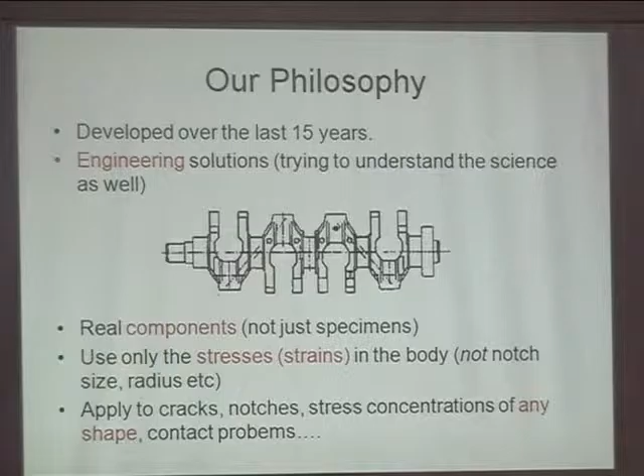But it does take you down a certain route. What we found over the years was that we stopped using cracks, because we found it's much easier to do tests using notched specimens rather than cracked specimens, as we find cracked ones tend to fool you. And in a lot of cases we're not very happy even about using plain specimens because they can fool you as well, and again, plain specimens are a thing that never happens in industry anyway. So nowadays we tend to do tests on specimens of several different types of notches, different sizes or shapes of notches, and come to our conclusions just based on those.

We assume, of course, that there's an accurate finite element analysis available, such as for this suspension component, which was done by Fiat. I suppose that really changed everything over the last 20 years, because it became possible to actually do that. For more and more components now, you can get a reasonable finite element analysis of the whole component with reasonable loading boundary conditions at the kind of resolution, the kind of element size, that we would need to incorporate some of our methods. So that's really why the things we were doing started to become interesting in industry.

As a matter of principle, we try and use linear elastic analysis just because it's easier and quicker, but of course there are problems for which it's just not going to work, and then we give it up and use something else. I think it's also important when trying to do this kind of work to have some kind of target for what is a successful result, because you make your predictions and then compare them to experimental data. You want to know whether you're right or not, and so we set this target accuracy of 20% on stress.

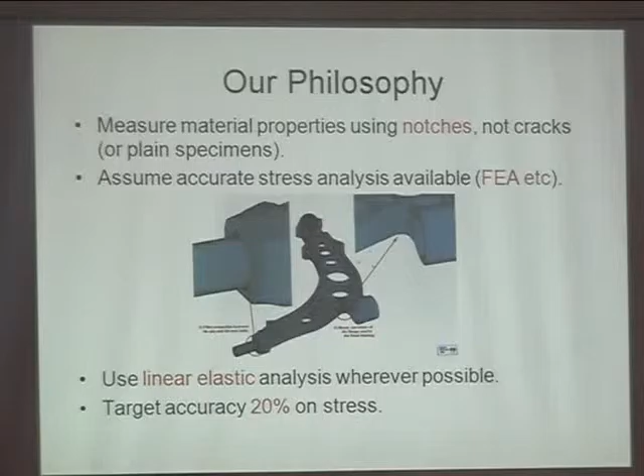So whether that's the stress for a brittle fracture or a stress for a fatigue strength or endurance limit, we said if we can predict the experimental results with better than 20% accuracy, then that job's done, we'll go and do another one. Because there's always going to be some errors of that kind of order inherent in the various data and predictions and models that we're using. So these were the overall principles that we started using all the way through.

So comparing stress fields, I suppose that's the crux of the whole problem here at this conference. If you imagine two different bodies, both of which have got some kind of stress concentration feature in them, and you look at the stress fields, or you could say strain fields or energy fields, it doesn't matter, the two bodies are going to have the same mechanical behavior if the two stress fields are the same. So if one is going to fail, the other is going to fail, and so on. Really, all we're talking about is what do we mean by the same. Sounds silly, but here's a more concrete example.

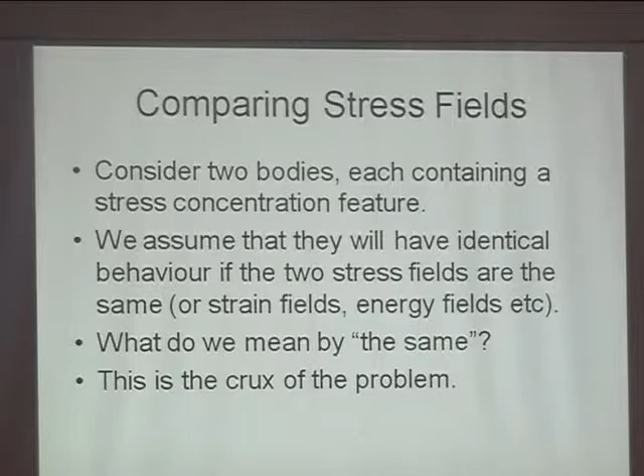So I'm going to talk about two methods which we developed, one called the crack modelling method and the other called the critical distance theory, which both really just come down to this question: you've got two wiggly lines and you want to know whether they're going to lead to the same physical behaviour or not. So the first one is this thing called the crack modelling method, and this goes back to some work done by Rod Smith and Keith Miller in the 1970s. It was a little bit of work, they only published a few papers on it, and it's one of these things I think is really important and useful, and it hasn't really been picked up or used very much. In fact, I think it's actually the best thing that Rod Smith and Keith Miller ever did, but we can argue about that later.

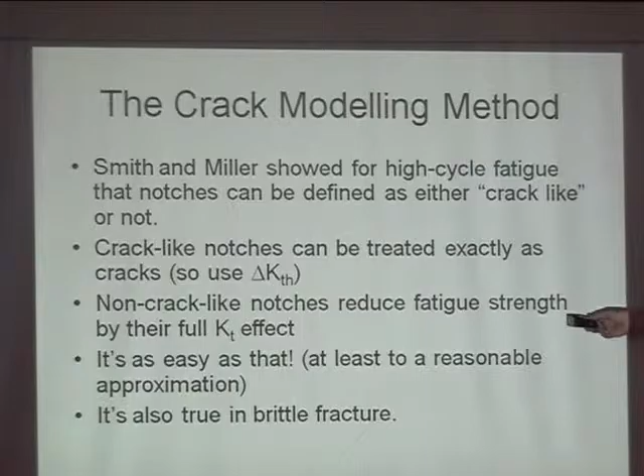So really, all these strange empirical equations and things for comparing KT and KF—you don't need to use them at all, because this is the case. Either you can use KT or you can't, and if you can't, you can just pretend that the notch is a crack. It really is as easy as that. They did it for high cycle fatigue, and it turns out to also be true for brittle fracture, and these are the kind of graphs they were drawing.

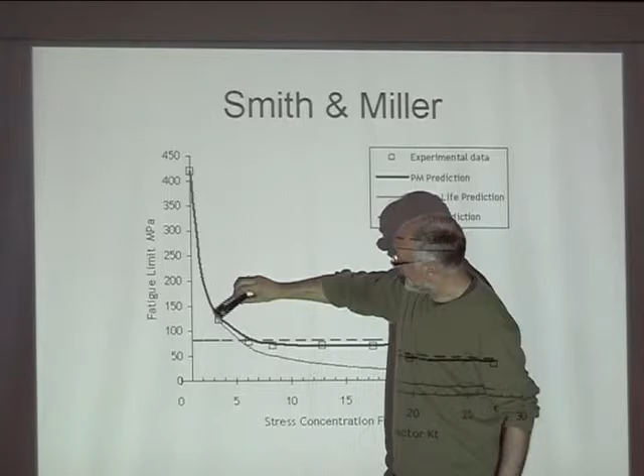This is some data from tests on notches in steel, which I put together with their predictions, but it works the same way. Here you're looking at a fatigue limit for a series of different notches with different KT factors, and what's constant is the length of the notch. In all these specimens the notch length is the same, so KT is being increased by sharpening up the root radius. If you have a low KT factor, less than about 4 in this case, then the fatigue limit—this is the plain fatigue limit—just comes down, and it comes down exactly by dividing by KT. That's very simple.

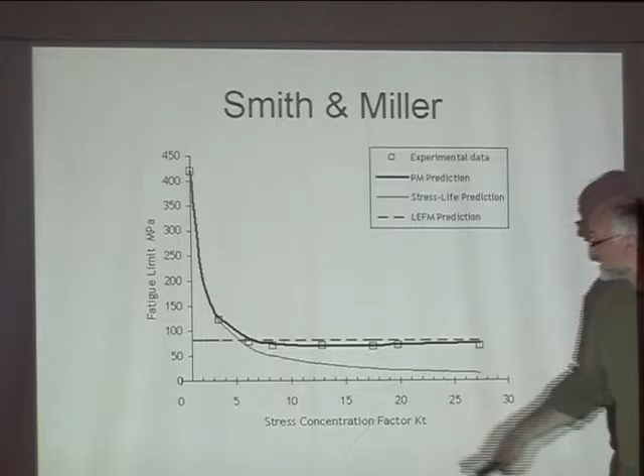The dividing-by-KT line carries on down here, and obviously underestimates the data when you have sharp notches, but all the sharp notch data lie on that dashed line, which is the LEFM prediction, just pretending that these notches are cracks. This would be a prediction valid out here at KT equals infinity, but in fact it turns out to be valid all the way into the point where these two lines cross over.

So there are some differences, of course, between the data points and the predictions, but they're really very close for a lot of different materials. That's what they did, and I think that's very important.

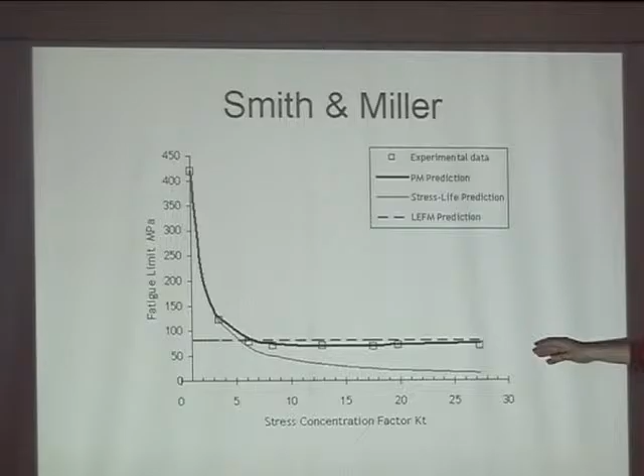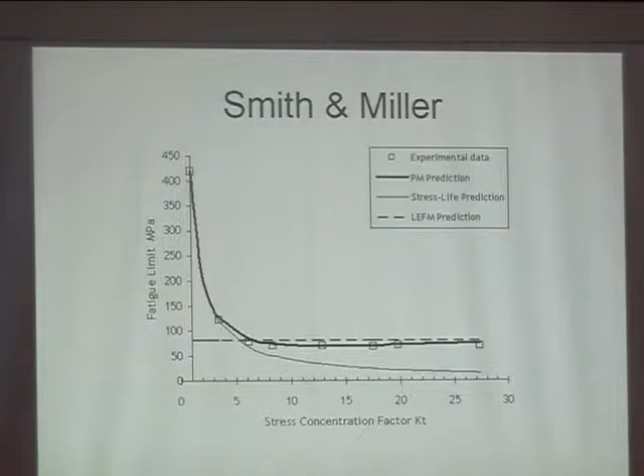The problem then with translating that into using it for an engineering component is to know what the LEFM prediction is in the case of a component. In this case it's fine because I've got a notch at a certain depth—let's say an edge notch of 3 millimeters long—so I can say that's the same as an edge crack 3 millimeters long. Now I know the equation for stress intensity and I can plug it in.

But suppose I don't have that—suppose I've got a component which has a corner with a certain fillet radius or something like that. If it's a 90-degree corner, for example, and the fillet radius is small enough, I can imagine that it's going to be one of these crack-like notches. But the problem is, what crack is it now like? Because I don't have a length anymore, so I don't have any way of calculating the K value.

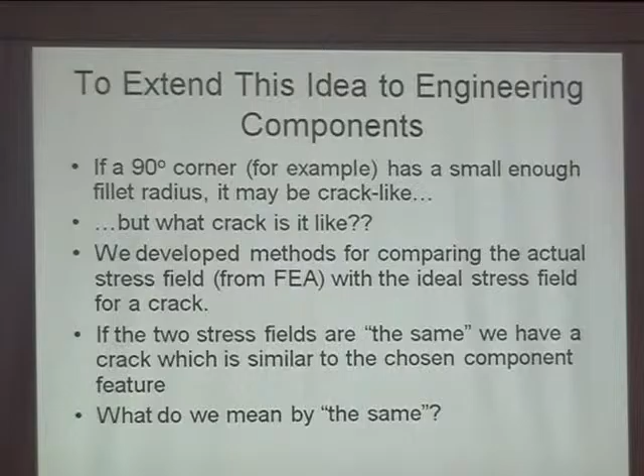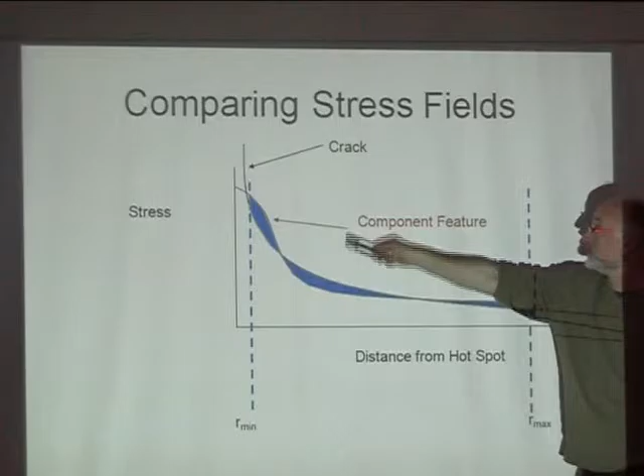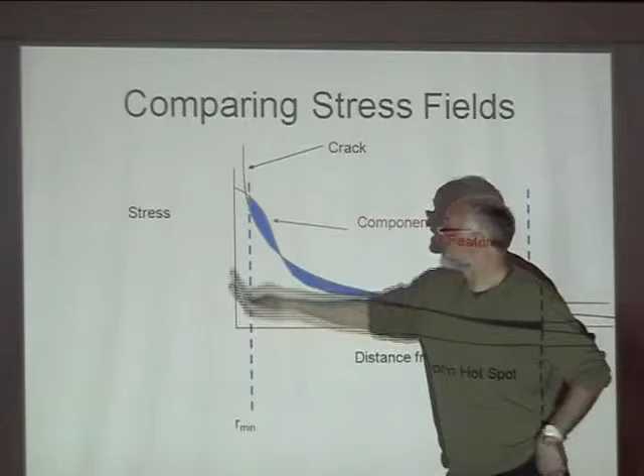So what we did was develop some methods of post-processing the FEA stress field to find out what crack this problem corresponds to. And so we come upon this problem of two stress fields and deciding whether they're the same or not. It doesn't matter too much what method you use, but we just use a method of minimizing the area between these two lines—between the line that corresponds to the crack and the line that corresponds to the component feature.

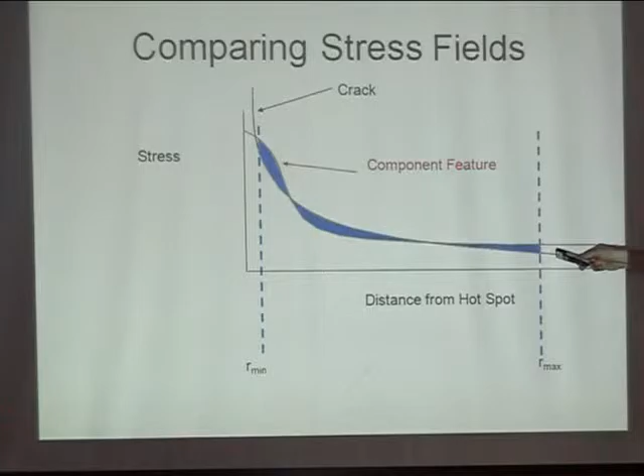Of course, you have to have limits on this. You can't look at R equals 0 because the crack stress has gone to infinity, so you have to have some positive R min. And you don't want to look too far out because you might start seeing effects due to other features in the component or whatever. So you have to limit yourself to two values there. But apart from that, it's not difficult.

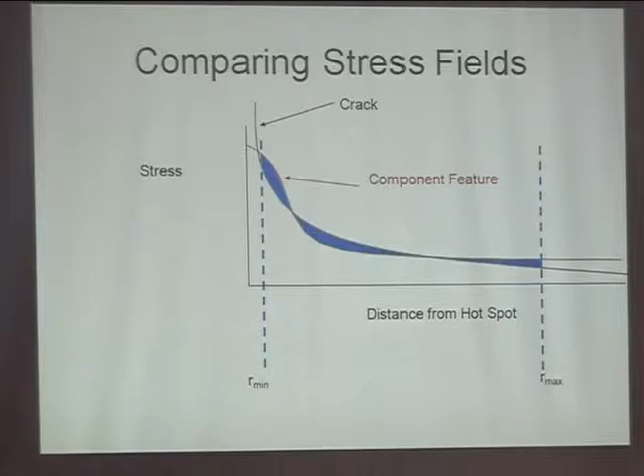Then all you do is keep changing the parameters in the crack model, varying the position of the crack line until you get a crack line that's as close as possible to the component feature line, and that's your best guess as to the equivalent crack for the problem. So that's it—it works remarkably well.

I won't show you results because we've published a number of papers with all these results in, but suffice it to say, we looked at a lot of different materials and different notches, and also 3 or 4 actual component problems where we could get good results from this.

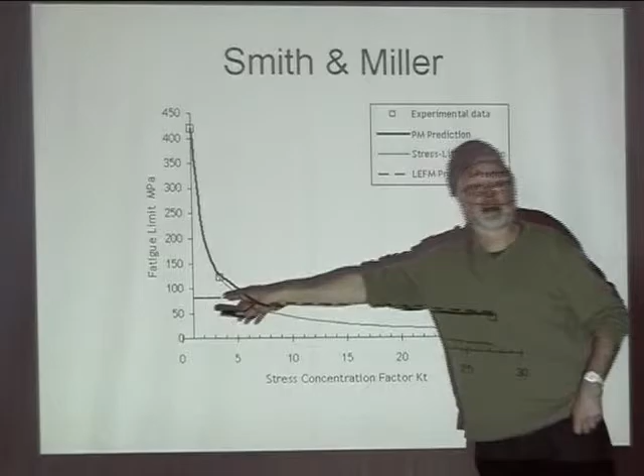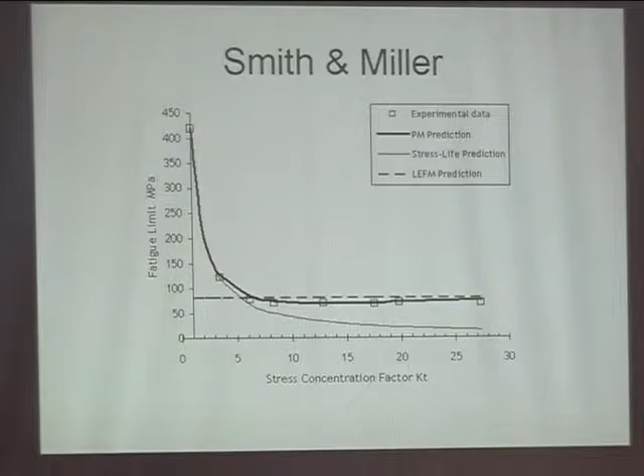It's a funny thing actually that very often the notches or features don't really look like cracks at all. If I go back to that graph, here it's crossing over at a KT value of about 5, but for some materials that crossover could happen at 3 or less. So you might have something that's actually a circular hole, for example—you wouldn't dream of thinking it was a crack, but it turns out to be one of these crack-like notches, and the prediction works fine for it anyway. So sometimes intuitively you wouldn't expect to use a crack model, but it turns out you can.

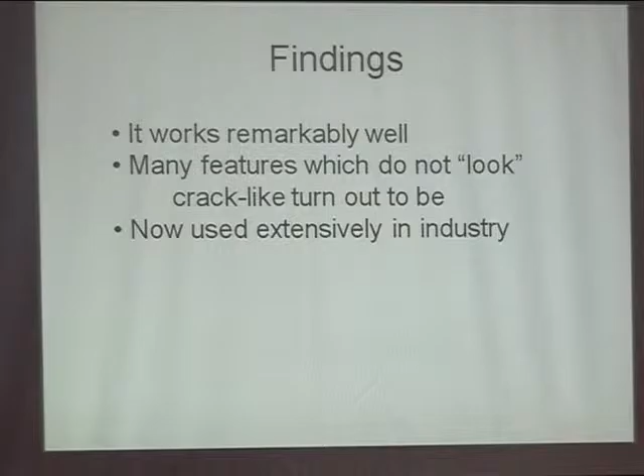Okay, so that's that one. That's the first of the two models.

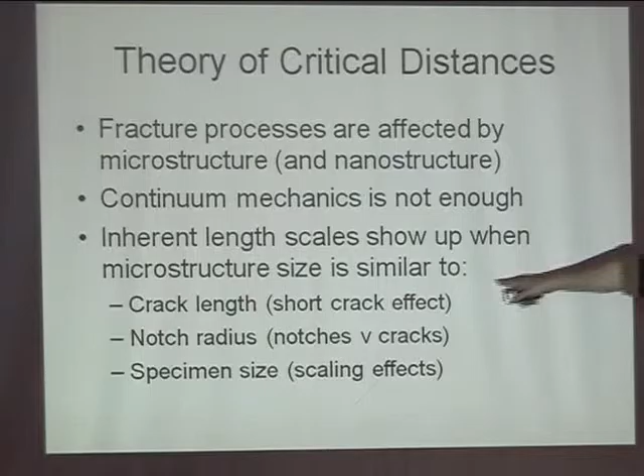This critical distance method is really just the simplest possible way of introducing the idea of microstructure, the idea of a length scale, into what is otherwise a continuum mechanics model. We define some length constant which stays constant, and when you change the scale of the rest of the problem, the length constant doesn't change—so this corrects the continuum solutions in all these problems.

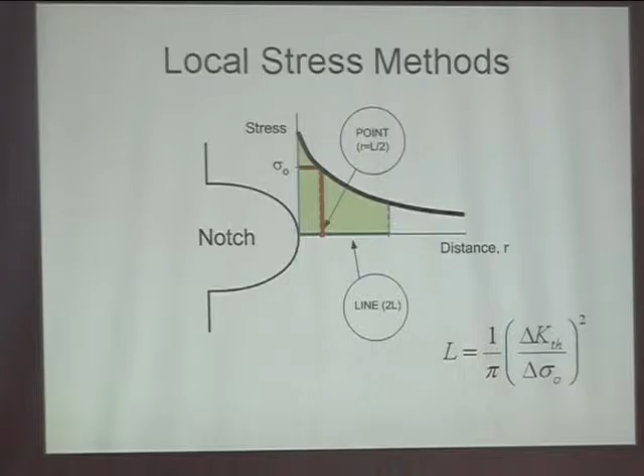Within the family of what we call the theory of critical distances, there are two types of methods. One is based on local stresses, either averaging stresses on a line or area, or choosing a stress at a point. Then there are stress intensity methods, such as having a notch with no crack there, but imagining there's a crack there—or a new one I've been working on with Pietro Cornetti and people in Torino, which we call finite crack extension, where we imagine the crack goes forwards not smoothly and continuously, but in jumps, and the size of the jump becomes important.

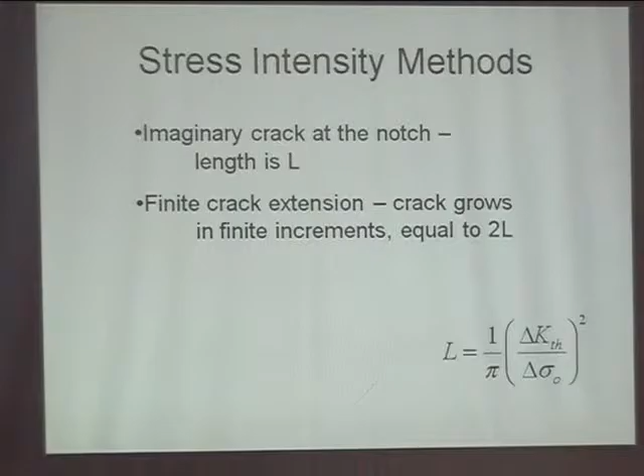The interesting thing is that all these distances—whether you're talking about the distances involved in these stress-based methods, or the lengths and increments of these cracks—they're always related to this constant L, which always has the same formulation. It keeps jumping out at you, whichever kind of method you try to use.

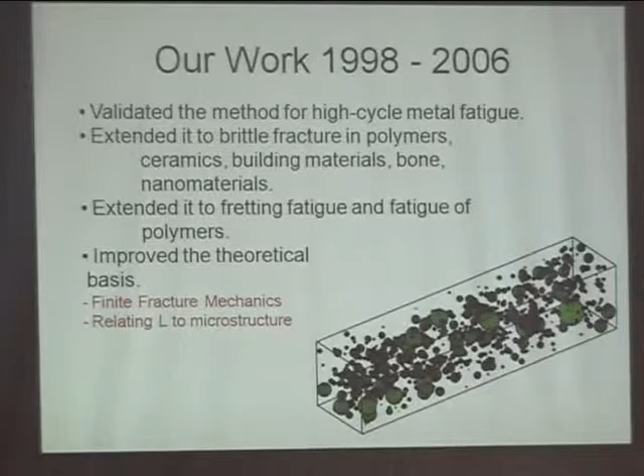Brief history, which I won't do because I don't have time, so I'm not going to talk about that.

Work that we've done over this period of time was mostly in extending the theory, extending its use into different domains, looking at different kinds of materials and problems in fatigue and fracture, and also trying to understand more the theoretical basis of why this method works. For me, this finite fracture mechanics—this fracture mechanics of crack jumping—is, I think, the best theoretical justification for the theory of critical distances. On a more qualitative scale, L has always got to be connected back to something in the microstructure, and very often you can show that L is directly proportional to something like grain size.

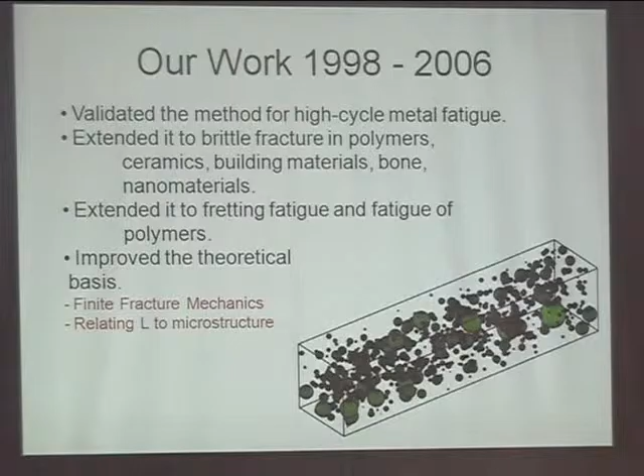Obviously it depends on what material you're talking about, but in cleavage fracture of steels, for example, steels at low temperature, L is exactly equal to the grain size, and there's a direct proportionality there. So those are other examples of that.

Recent work has been mostly done by Luca, who has really attacked the fatigue problem very seriously. He's been over in our labs doing lots of tests and building lots of models, and he's been putting my name on the papers as well, but I'm not really sure why. If you have any questions about this, he can answer them.

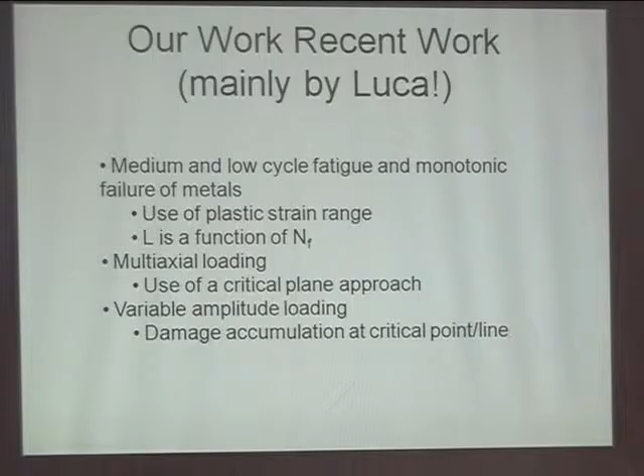I guess he took the view that in order for this theory to be taken seriously in fatigue, you have to attack the difficult engineering problems, especially medium and low cycle fatigue, multiaxial loading, and variable amplitude loading. In each case, he's shown that you can take some existing approach, like for example in multiaxial loading a critical plane approach, and combine that with the critical distance theory, do all the calculations, and it still works out.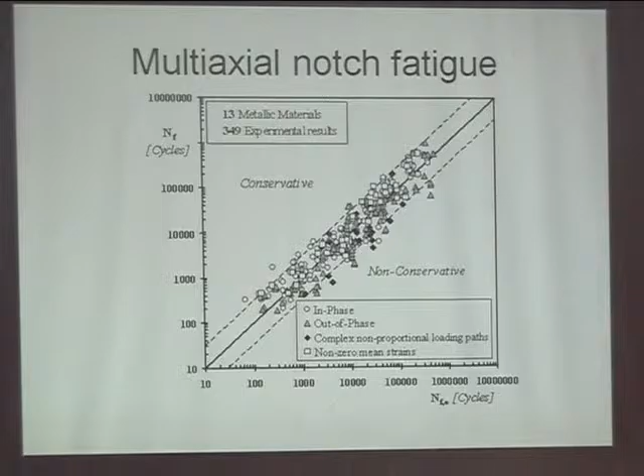In this case, 300 and something experimental results, plotting the actual number of cycles to failure against the predicted value. The criteria for success here is if the data falls within these dashed lines, because that means the scatter is no worse than the scatter on the original SN curves. Of course, you can't really do any better than that.

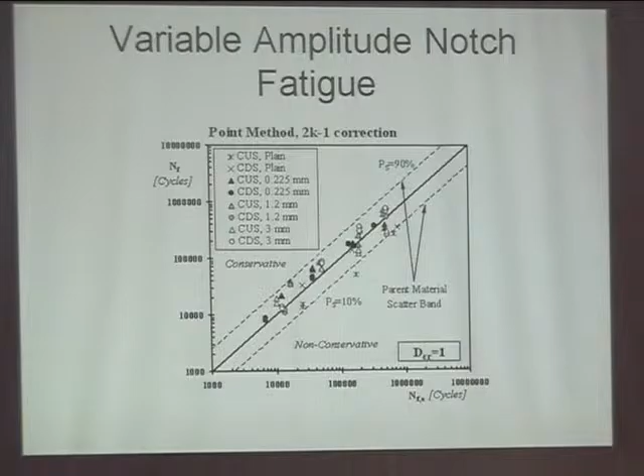You can see that looks pretty good, for a lot of different types of multiaxial loading. And then this one is for a number of different types of variable amplitude load spectra, and again the predictions come out very well. So thank you for listening to that very quick and rather philosophical chat.

The only concluding remark I'll pick out, and this is really true, is that if you want to be convinced about these methods, just try them, because they're very easy. A lot of people will say this is too easy, it couldn't possibly work. But we find that anybody who's actually made a few models, done a few tests, and gone through the process of implementing the model is generally convinced of the value of these things. So give it a go. That's what I'm saying. Thank you.

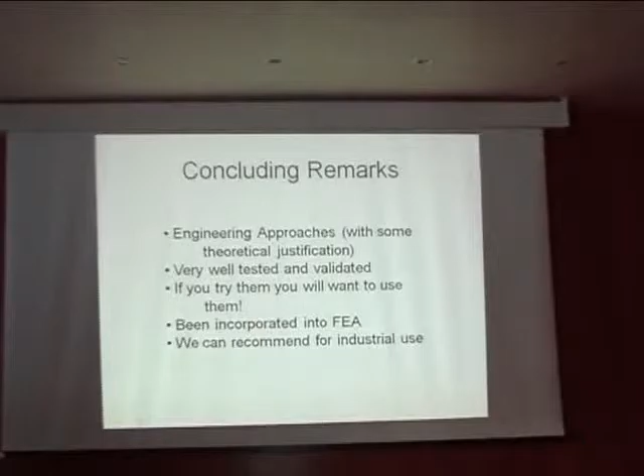Okay, maybe to make it much easier for you, what kind of singularity are we talking about? Because in nature, cracks never have a zero radius crack tip. Even with an ideal cleavage crack, you have a radius on the order of atomic distance. So there is no zero crack, there is no real singularity. Every crack you find is actually a sharp notch.

That's the first comment, and the second, which was also mentioned, is that you have no linear elasticity—you always find non-linear elasticity. If you go to say 0.2%, you have non-linear behavior. So everything—you have no real singularity. Okay, so I think he's agreeing with me, isn't it?

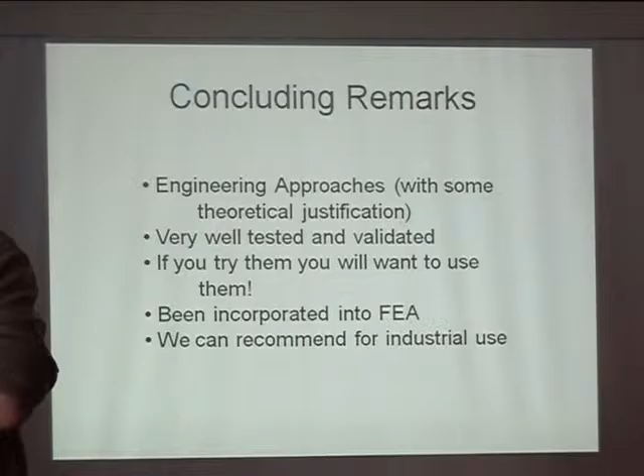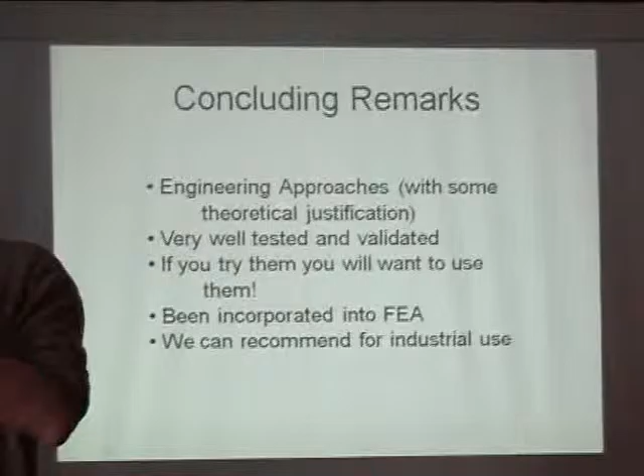Oh yeah, no, I see no problem. Actually, funnily enough, looking at the data, that's sometimes yes and sometimes no—sometimes it's pretty much constant, but sometimes it changes a lot. You're right. I guess what we're doing is always finding the critical distance without reference to the microstructure. We find it by doing tests on, say, a couple of different notch geometries, and this value pops up as the correct one to predict the data. But then, of course, it's interesting to look and see how that compares to the microstructure.

As I say, in some cases there's an exact correspondence between the crack length and the microstructure, but in some cases there's not, and you wouldn't really expect that, because grain size doesn't do everything. In a problem like fatigue, the grain size may be affecting the yield strength and plastic behavior, and that may be affecting the amount of plasticity-induced closure you get, and it's the closure which really decides whether the crack grows or not. So there's always a link back to the microstructure, because microstructure controls everything, but it may not be a simple relationship like that.

Funnily enough, a guy called me up the other day with a problem replacing a component in a power station. He said, I have this cast chromium steel with a very big grain size of 3 millimeters, and I'm worried about whether it'll be okay with these sharp notches we're putting in it. I said, well, you need to do some tests and find out what the critical distance is, but I guess it'll be about 3 millimeters. He came back to me a month later and said, hey, you were right. So sometimes you just get lucky.

Just asking about plane stress and plane strain, you will have a different L value because you have a different toughness or a different fatigue threshold. If you're talking about toughness, of course the toughness in plane stress and plane strain will be different. So you'll get a larger L value in plane stress. We've shown some interesting cases with data for notches in metals, where as the notch becomes blunter and you have to apply more stress, it changes the constraint - it changes from plane strain towards plane stress, and we can predict that. So the L value obviously changes.

I have a last question - how would you measure or find that critical distance in a single crystal when you cannot relate it to a grain size because it's a big crystal? Well, yes indeed, and then you get into the fact that it's probably related to some structural distances which control the strength and toughness of that crystal. So if the crystal has precipitates in it, it might be precipitate spacing. If there's nothing, it might be the atomic spacing. There are some materials, like carbon nanotubes, where the critical distance is just the distance between the atoms because there's nothing else in it.